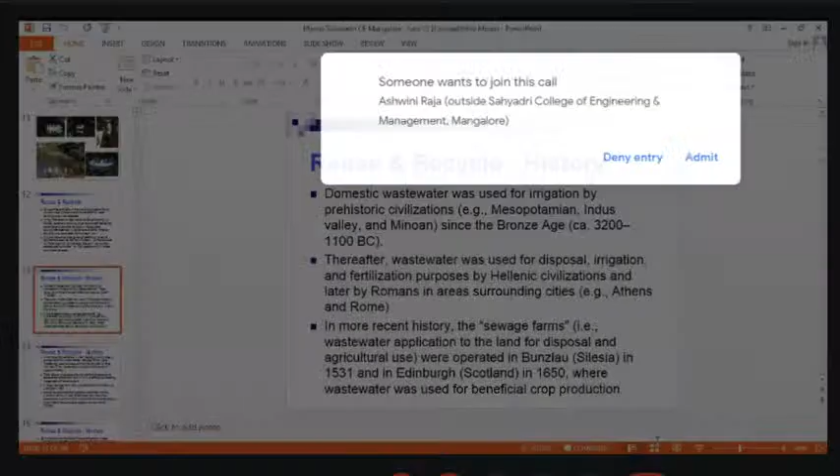No, no, it's not in slideshow mode. One minute. Yes, it's moving, but not. I'll do one thing. It's in, no? Yes, sir. The next slide. I can see. Now reuse and recycle, history. Photos are not seen, no? No. Slide movement is not possible, but this is okay.

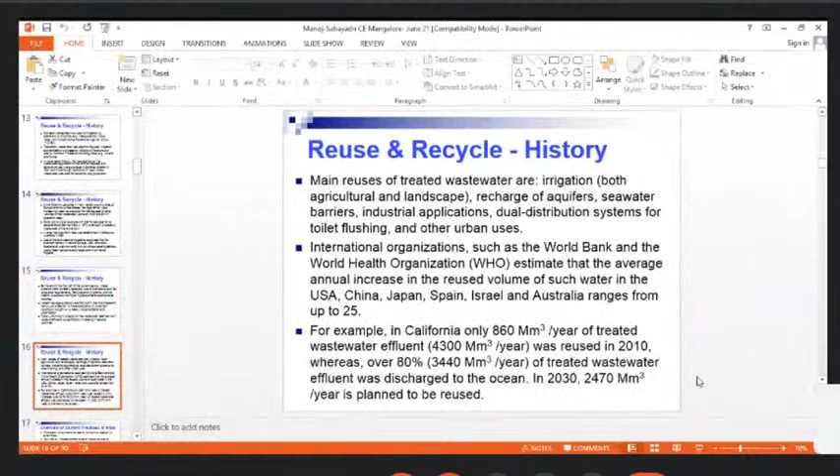Okay, sir. These photos you can see now, no? Yes, now you're zoomed, I guess. And the next slide, reuse and recycle. History. Now it is the 16th slide. Sir, if you make it full screen mode, it is not visible? The slide movement is not taking. If I make it full screen, the first slide you can see now, no? It is not in full screen mode.

Sir, if you share it as entire screen. Entire screen, stop sharing. One minute, I'll try that. It is not taking. You have to click that window, sir. Window only I clicked. Yeah, now it is coming. Your entire screen can be seen now. Now open PowerPoint from desktop. Now click slideshow.

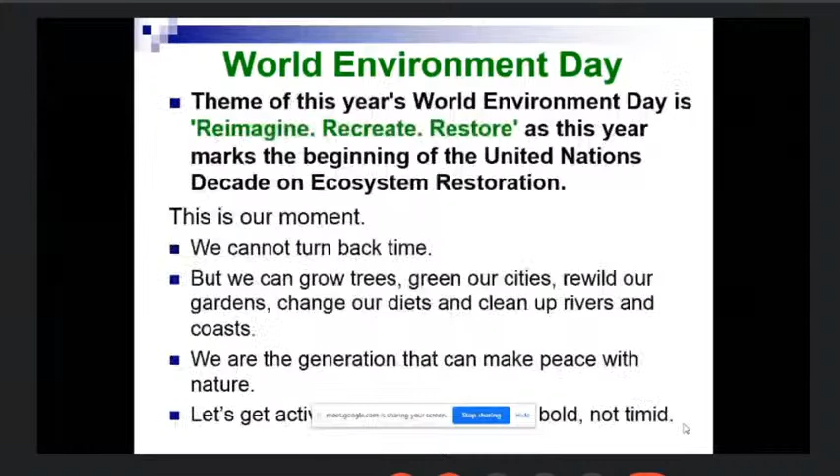Yes, now I can see the full slide. Second slide, third slide. Third, yes, sir. Ecosystem restoration. Okay, then I'll make it like this only. Yes, sir. Okay, sir. Fine, sir.

Sunil, you start. Okay, sir. Prakash, sir. Okay. Yes, sir.

Good morning, all. So today we are gathered here for a webinar on advanced wastewater treatment for utility of treated wastewater for secondary purposes.

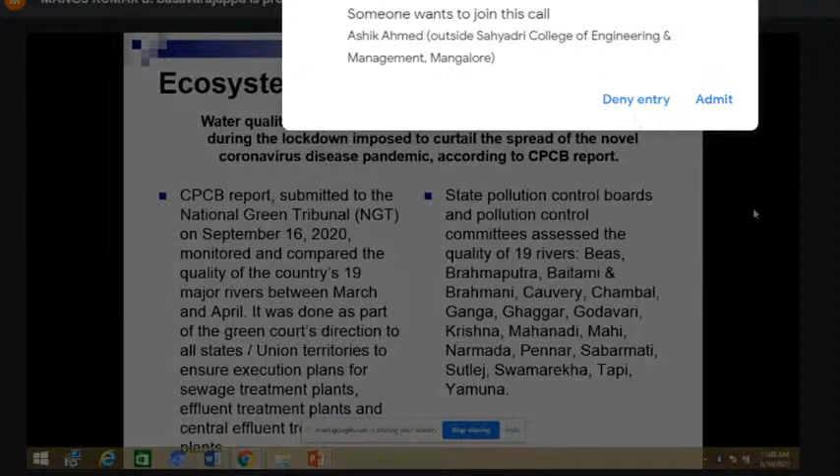That is considered for Yamuna near New Delhi as well. All these rivers have been considered polluted. So there is a requirement of stopping the effluent discharge to such rivers.

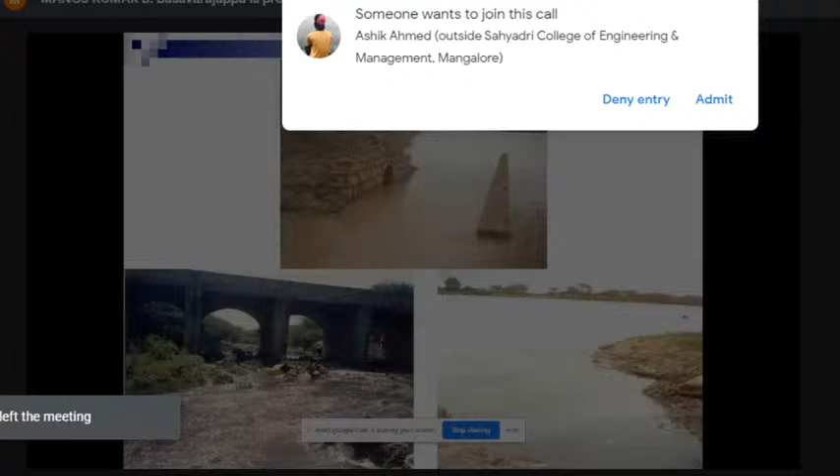Whenever we go for monitoring of rivers, I have taken some photographs. These are all photographs taken by myself, not from internet resources. The top photograph is from Kaveri. There you can see the fort, and there is a pipeline that is actually a tunnel for entry and exit of soldiers during Tipu Sultan's time.

Now that tunnel is converted to a pipe outfall for wastewater discharge into the Kaveri River. Just opposite this outfall, there is an intake for Mandya city, and during summer season this wastewater might reach near that intake. That is the reason they have constructed a wall.

The bottom two figures are near Davangere. There is a halla called Betur Halla near Davangere, near the Old City, and it is Old City wastewater which is running in that halla. You can see washing activities, cloth or utensils, in the same water, and this same water will reach Tungabhadra River, the bottom right photograph.

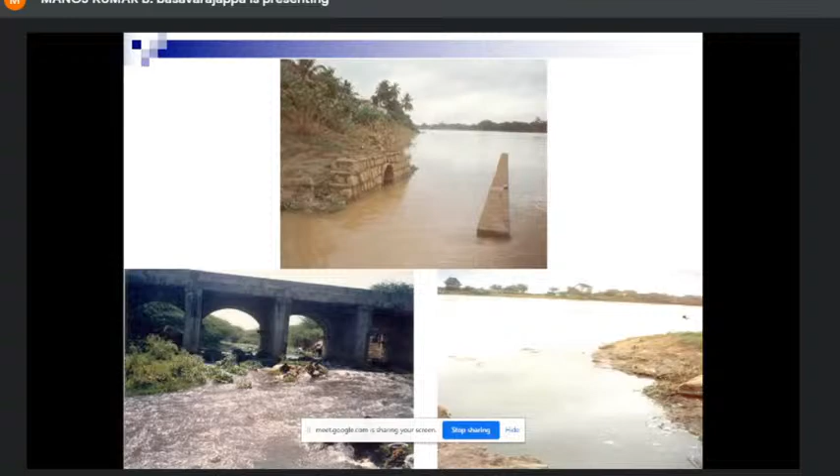Again, you can see nutrients presence in wastewater. That is the reason I'll make a presentation on that. The nutrient removal is very important from wastewater. If it is left in the wastewater by treating only removal of BOD or COD, it causes aquatic plant growth.

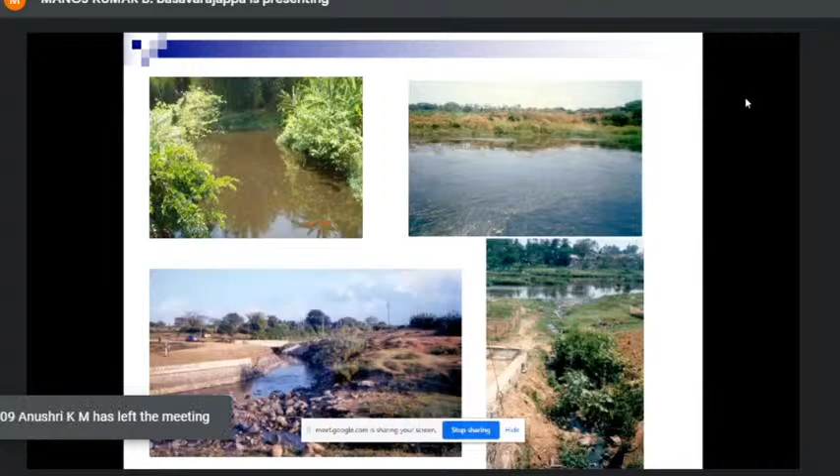Such growth happens in rivers like this, top photograph. Bottom, this is in Nanjangud. Now this is not happening. There was a textile industry, and this was an irrigation channel. You can see the channel, and colored effluent entering into the channel. Now that industry has been closed.

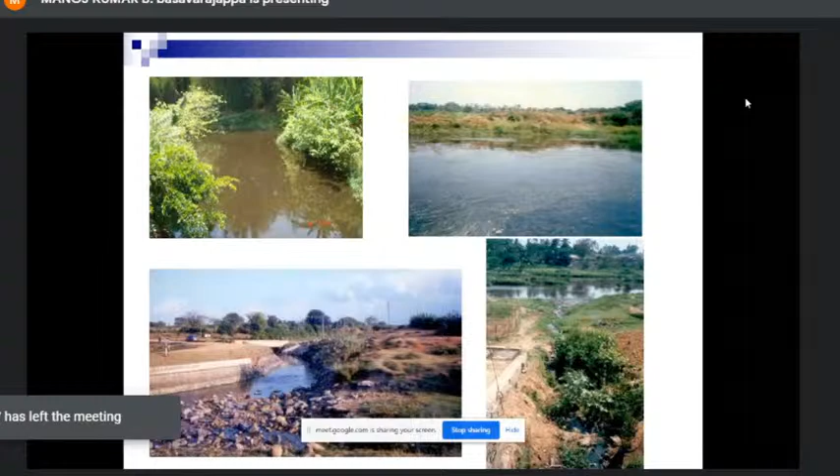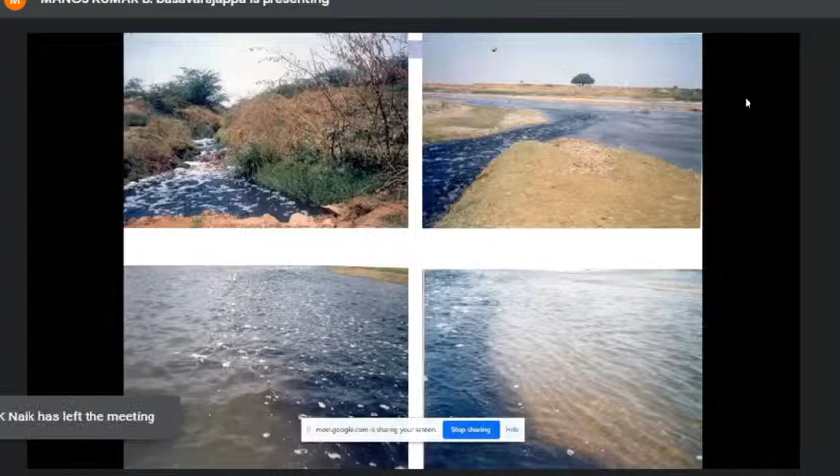And this is again Tungabhadra River near Harihar town, polluted by industrial effluent. You can see from the bank the wastewater is entering into the river, and river flow is very less. You can see the bottom photograph, the depth of the river, bottom of the river. In such low flow conditions, the impact on river water quality will be more.

When we went for Kali River monitoring, we saw many alligators in that stretch where the effluent is entering into the river. So in extreme summer, the impact on aquatic species will also be more.

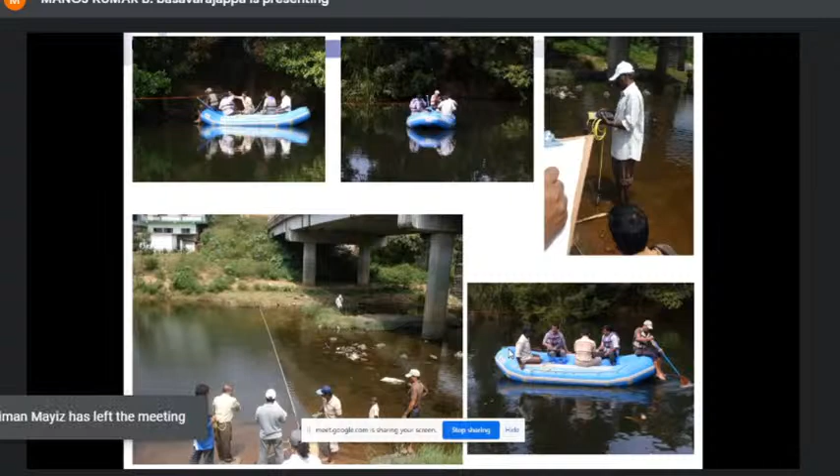And once we pollute the river by discharging wastewater, the monitoring is very, very expensive. This is how we monitor from our institute. This is in Madikeri, wherein coffee pulping wastewater is getting discharged into the Kaveri stream. We are monitoring it, and it is very expensive, and we cannot monitor all the time.

So basically, we have to prevent wastewater entry into the river. How can wastewater entry into such rivers be prevented? By treating the wastewater and reusing or recycling it. Several industries are following that. They are not letting out their effluent outside their premises. They are reusing it for various secondary purposes.

That is what my presentation is about. With this introduction, we will go to reuse and recycle. 80 countries and 40% of world population are facing chronic water problems, and the demand for water is doubling every 2 decades. Every 20 years, the demand is increasing.

In the handbook on service level benchmarking, by the Ministry of Urban Development, Government of India, they have defined reuse and recycling of sewage as the percentage of sewage recycled or reused after appropriate treatment. This is very important - after appropriate treatment, in gardens, parks, irrigation, etc. And it is to be at least 20% to begin with.

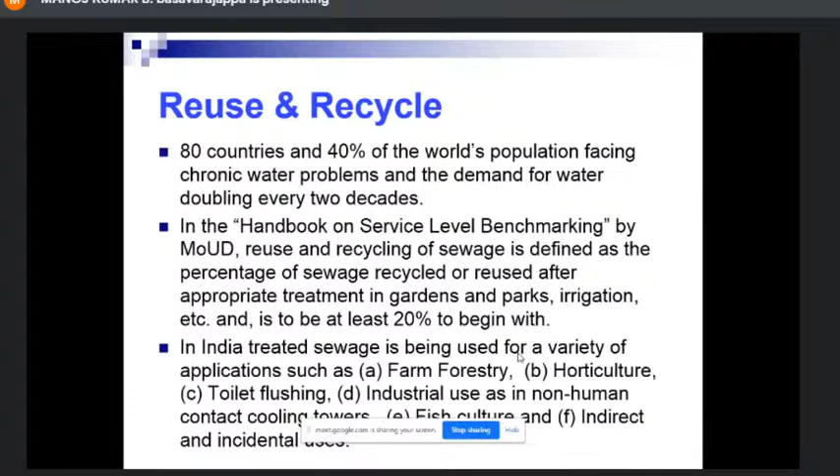In fact, whatever wastewater they are generating from their premises, they are treating it, and adjacent there is NAL. They are buying the wastewater generated from NAL, treating it in their premises, and reusing it for secondary purposes including cooling towers, fish culture, and indirect and incidental uses.

So coming to the history of reuse and recycle: domestic wastewater was used for irrigation by prehistoric civilization since the Bronze Age, that is 3200 BC. Wastewater was used for disposal, irrigation and fertilization purposes by Hellenic civilization, and later by Romans in areas surrounding cities. Whatever wastewater the city generated was used for irrigation purposes - examples are Athens and Rome.

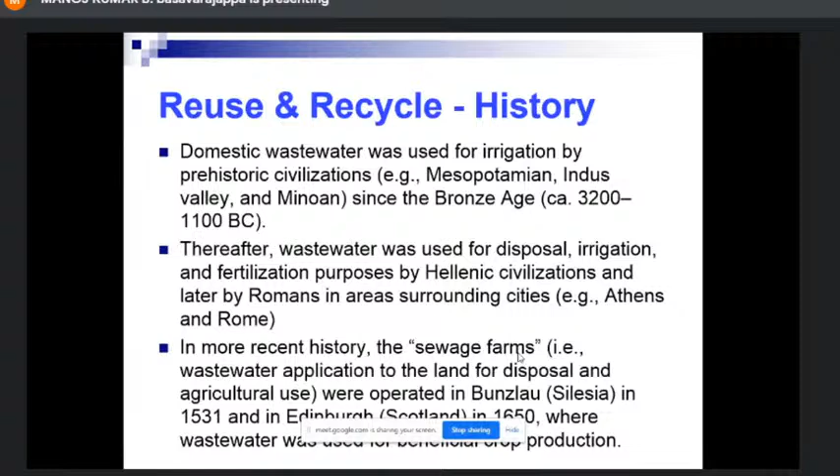In more recent history, sewage farms were developed for wastewater application to the land for disposal, which is nothing but agriculture use. In Silesia and in Scotland, in 1531 and 1650, it was practiced. In Europe and the United States also, sewage farms are there, and they are following this for centuries.

Paris is a typical example, with the first sewage farms established in 1872, eventually processing wastewater of the entire Paris town. In Melbourne, Australia, also in 1897, a sewage farm was established. The wastewater generated from Melbourne town was used for irrigation purpose. In the USA and Europe, in the 20th century also, they reused and recycled wastewater for irrigation purposes.

So modern sewage systems were first built in the mid-19th century, because there were drawbacks in the usage of wastewater for irrigation purposes.

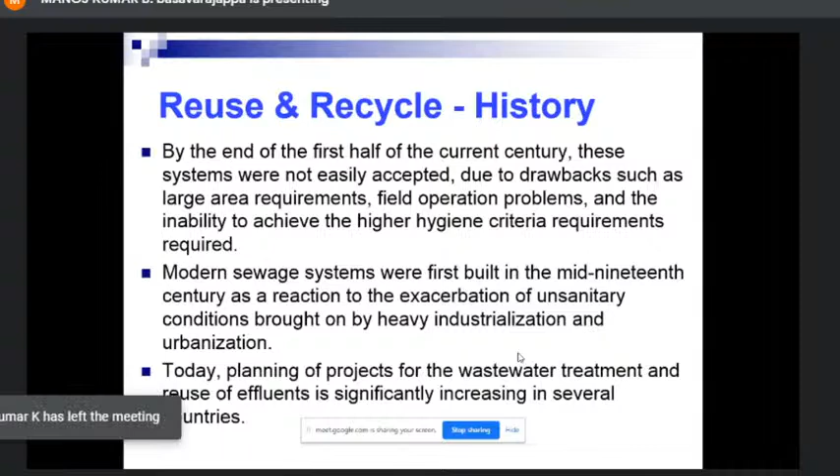Major issues are hygiene and health problems associated with irrigation farming. The modern sewage system was first built in the mid-19th century as a reaction to the exacerbation of unsanitary conditions brought on by heavy industrialization and urbanization. Today, the planning of projects for wastewater treatment and reuse of effluents has significantly increased in several countries, including India.

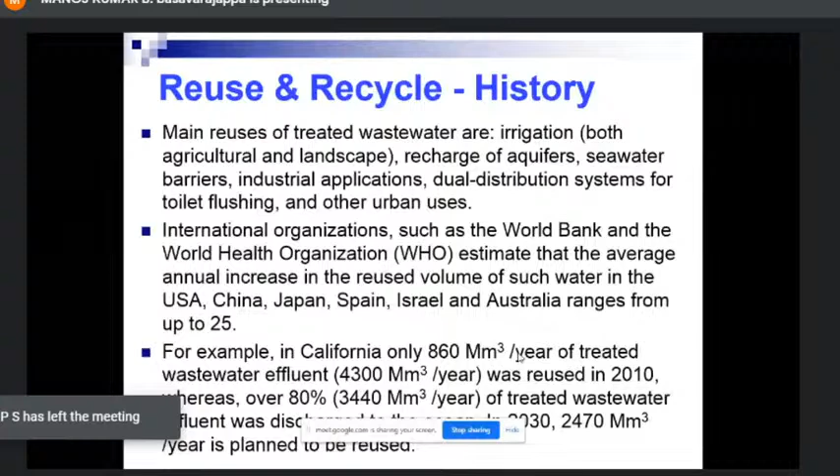Coming to Indian cities wherein treated sewage is utilized for various purposes. Chandigarh is using treated sewage for horticulture needs of its green areas. Delhi has put in place planned reuse of treated sewage for designated institutional centers, for secondary purposes only. Secondary treated sewage is purchased and treated for use as cooling water makeup in the industrial sector by Madras Refineries in Madras, as well as the GMR Vasavi power plant in Chennai, and RCF in Maharashtra.

RCF in Maharashtra is located in Chembur, Bombay. They are purchasing wastewater, not water, from the Mumbai Municipal Corporation, treating it in their premises, and using it for manufacturing processes. There is literature showing that buying raw drinking water for manufacturing would be expensive compared to purchasing wastewater from the corporation and treating it for manufacturing purposes.

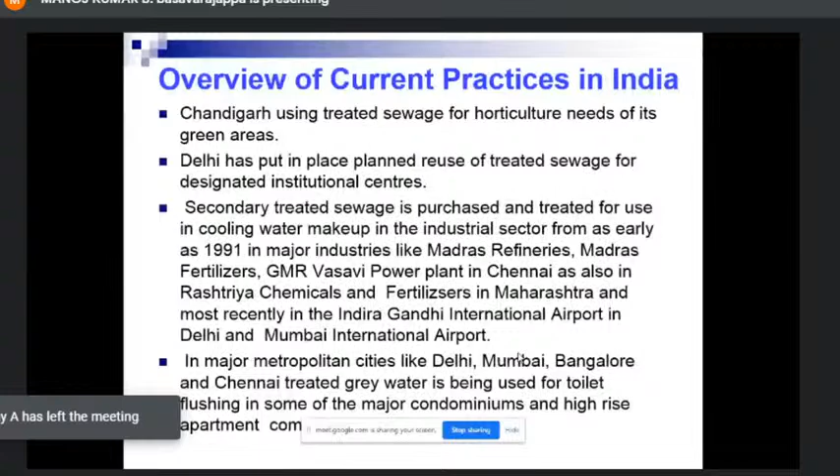So a major portion of the treated wastewater from high-rise apartments in major cities is being reused in their premises only. The government of Karnataka has also issued an official directive to ensure that only tertiary treated sewage is used for non-potable purposes like gardening, including parks, resorts, and golf courses. In fact, the Bangalore Water Supply and Sewerage Board is selling the treated wastewater in tankers to many such resorts, hotels, parks, and golf courses.

Indian Railways is also following reuse and recycling for washing their coaches in Bangalore and Mysuru. In Mysuru they recently erected an STP, a sewage treatment plant, and whatever wastewater is generated from their premises is taken to that STP and, after treatment, used for washing coaches. And ISRO Satellite Center, I gave this example.

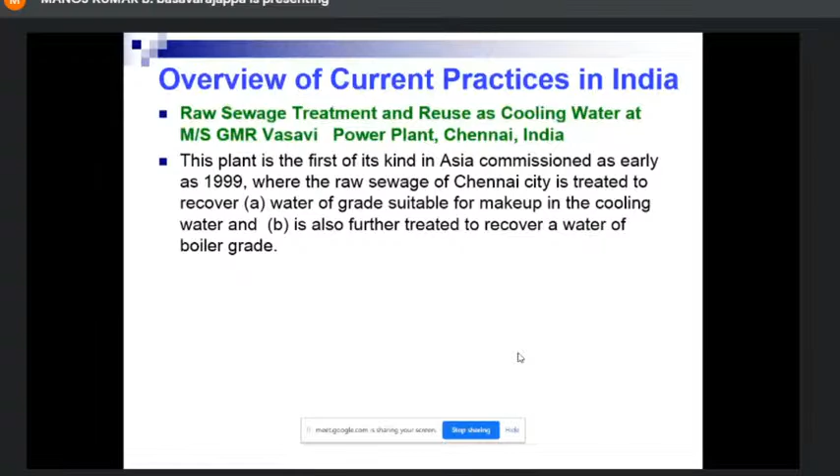Coming to the GMR Vasavi power plant at Chennai, this is the first of its kind in Asia, commissioned as early as 1999, wherein the raw sewage of Chennai city is treated in their plant premises to recover water of a grade suitable for cooling water makeup, and is further treated to recover boiler-grade water. This is the flow sheet of how they are doing it.

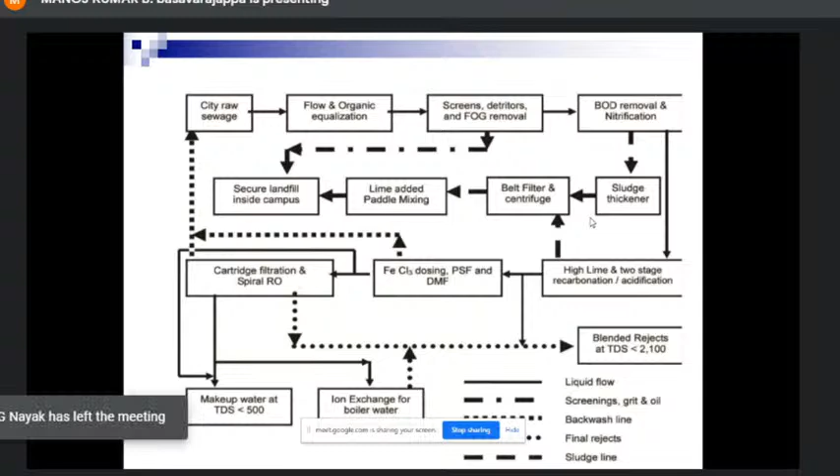They are using Chennai city raw sewage. They take it into a flow equalization tank and pass it through screens to remove coarse material, and a detritor to remove inert materials like glass pieces and seeds. Then they give biological treatment, including nitrification, so ammonia nitrogen is removed from the wastewater. It is sent to lime treatment, two-stage recarbonation and acidification. After that, ferric chloride dosing is done with the pressure sand filter.

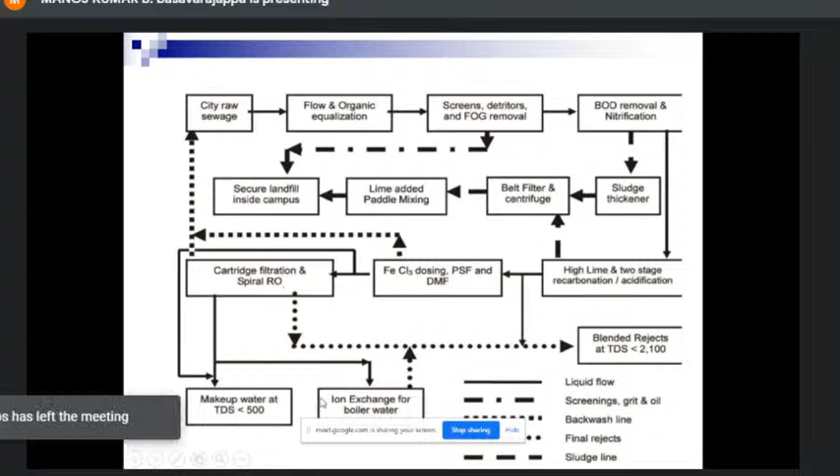It is passed through filtration and spiral RO, used as makeup water, and through ion exchange for boiler water. This reuse is practiced in Chennai and at the Indira Gandhi Airport. This is the latest plant in India, wherein they take raw water and treat it in a reverse osmosis system.

And whenever we use an RO unit, there will be rejects from RO, and that is taken and mixed with the sewage generated from the terminal building, and that is blended. That RO reject and sewage will be treated in a biological nitrification-denitrification reactor. In the previous case in Chennai, it was only biological nitrification. Here it is denitrification also.

The ammonia nitrogen present in sewage will be converted to nitrate nitrogen, and from nitrate to nitrogen gas. So there will be no nitrogen present in sewage after treatment. Then this is passed through FeCl3 to remove possible colloidal phosphorus also. All the nutrients will be removed, and finally it is passed through an ultrafiltration cartridge filter for killing the bacteria.

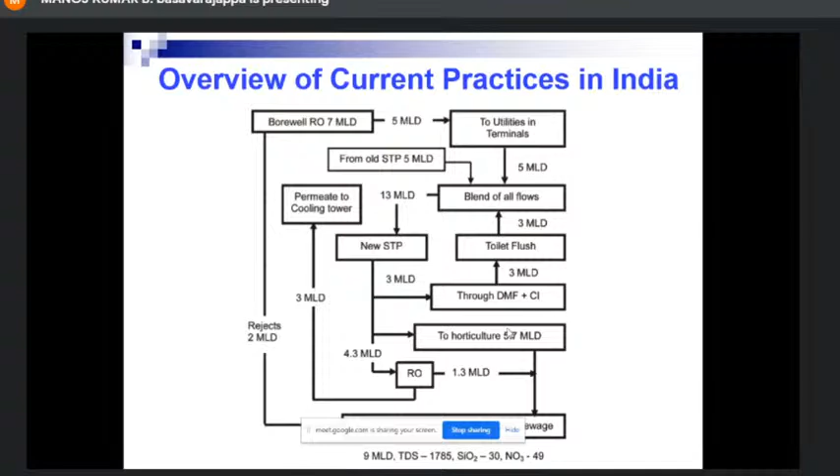The raw sewage BOD is 110 to 130 milligram per liter, and treated is 8 to 10. Ammonia nitrogen, as I said, is 45 to 53 milligram per liter. After nitrification and denitrification, it has come down to 1.5 to 3, and all the solids will be removed. In the final treated sewage, it is 10 to 15 milligram per liter. And this treated sewage is sent for further treatment for removal of phosphorus and ultrafiltration.

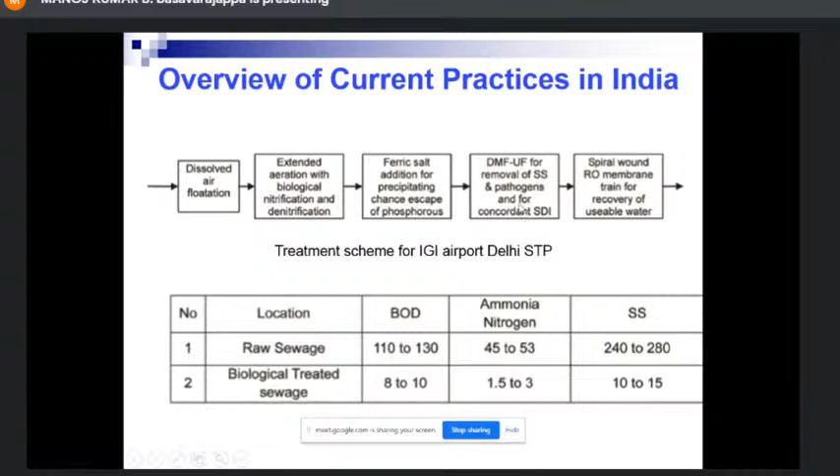Another plant is Mumbai International Airport. Here they are using a sequencing batch reactor, a circular sequencing batch reactor, followed by hypochlorination to kill the microorganisms. Then it is sent to pressure sand filtration and ultrafiltration. So the treated sewage is free of color, organics and odor, and this treated sewage is used for toilet flushing. And I will show you.

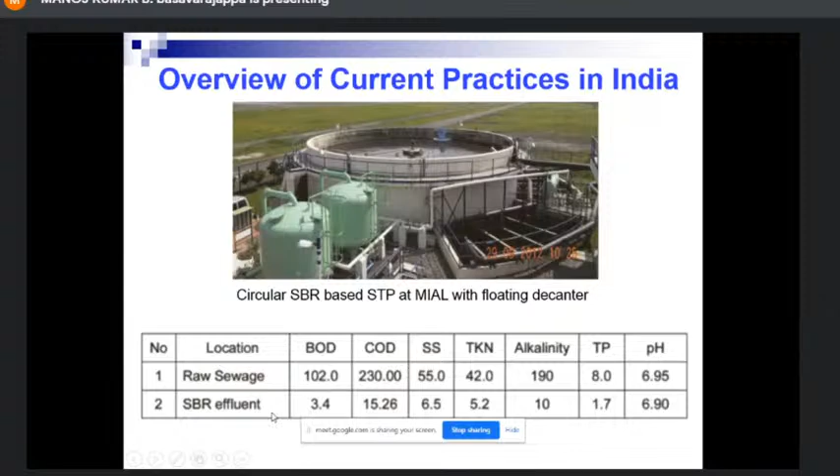This is the circular SBR at Mumbai International Airport. And these two green tanks are filters, pressure sand filter and dual media filtration. And this is the SBR treated effluent quality shown. BOD has reduced from 102 to 3.4, COD from 230 to 15.26.

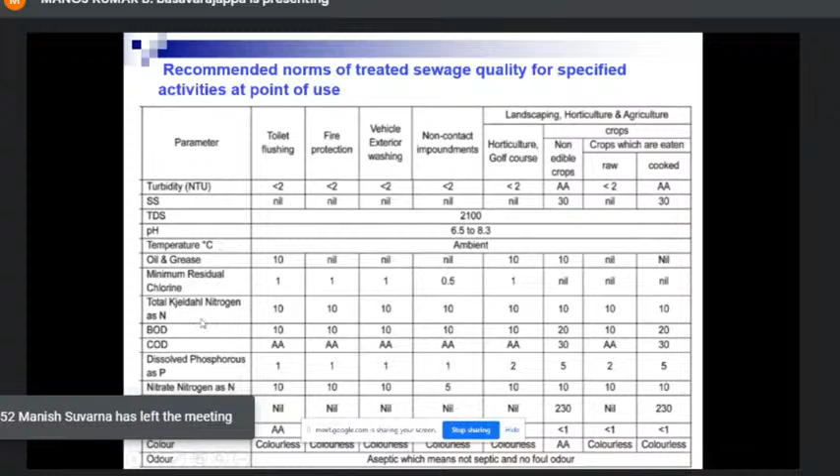One more very important thing is, whenever we use treated wastewater for secondary purposes, for example toilet flushing, fire protection or vehicle exterior washing, as is followed at Bangalore in apartments, what should be the quality of the recycled water? That is given here. For example nitrogen should be 10 milligram per liter. If it is less than 10 milligram per liter, we can use it for all these secondary purposes. Nitrate nitrogen, it is 10 and 5.

And fecal coliform, this is very important. It is nil except for irrigation purposes. Color, it is colorless. And TDS should be less than 2100 milligram per liter. So if we have to maintain this quality, for example BOD less than 10, phosphorus less than 1, nitrogen less than 10, then we have to treat it in a proper treatment system.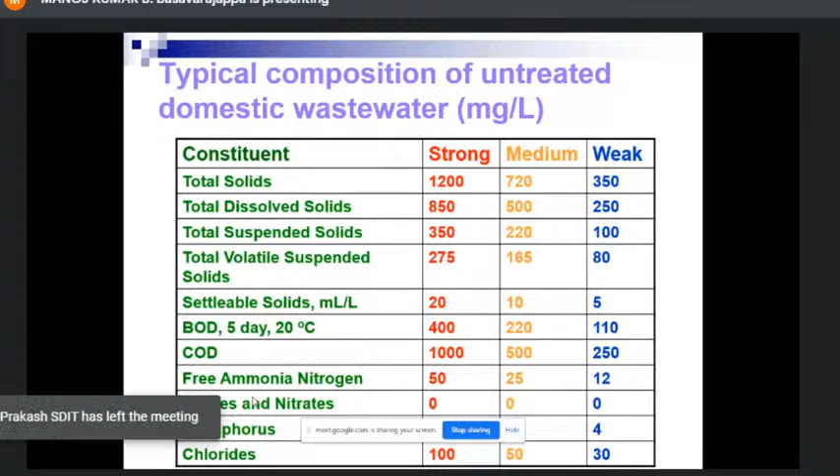And whatever wastewater is generated from any premises, whether it is domestic, for example in apartments, or from a town or city, it can be distinguished as strong, medium and weak wastewater by characterizing its constituents in the laboratory. For example, if BOD is 400, it is strong. If BOD is 220, we will call it medium with respect to that pollutant. If it is 110, weak.

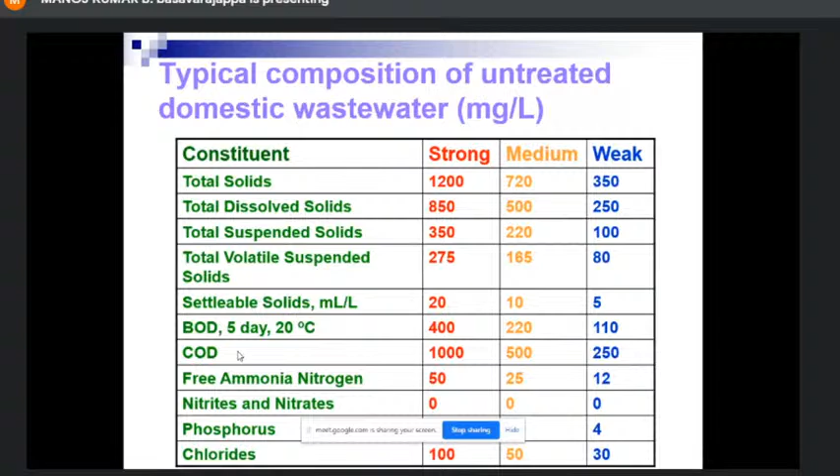Similarly, ammonia nitrogen 50, 25, 12. So based on its characteristics, we will distinguish it as strong, medium, and weak, and accordingly we will treat the wastewater in a treatment plant. And we can classify wastewater treatment methods as physical, chemical, and biological. Physical is unit operations; there is no process involved.

Say for example, in screens, wastewater flows through the screens, and whatever material is larger than the opening size will be arrested in front of the screen. That is an operation. The solids or any grit material present in wastewater, when sent to a settling tank, will settle to the bottom. There is no process involved. It is an operation, a settling operation.

Whereas chemical and biological are unit processes. Some reactions will be taking place in the reactor while treating the wastewater. Physical unit operations: the units are screens, sedimentation, flotation to remove oil and grease, and filtration. All these are physical unit operations.

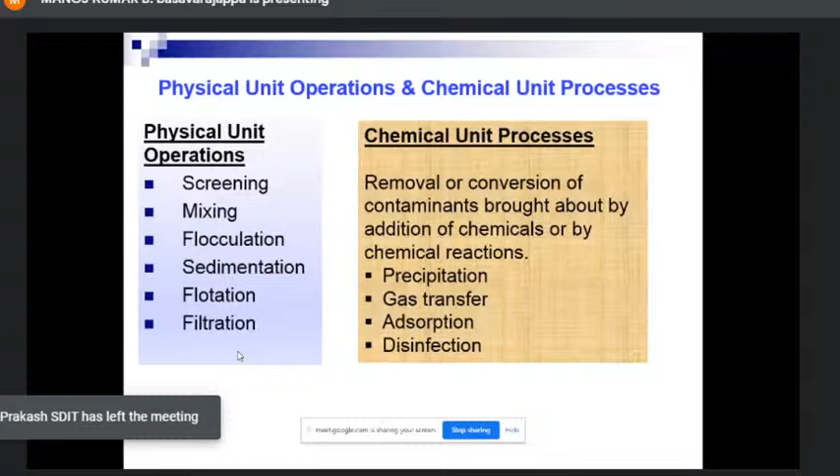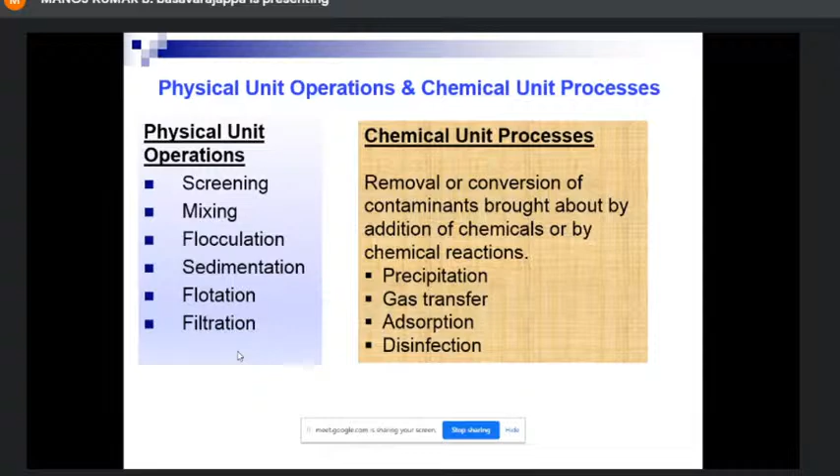Chemical unit processes: precipitation. Say for example, if we want to remove phosphorus, we can remove the phosphorus from wastewater by precipitation. Gas transfer, adsorption, disinfection, all these are chemical unit processes wherein no microorganisms will be used for treating wastewater. Biological unit processes are ones which use microorganisms for treating the wastewater.

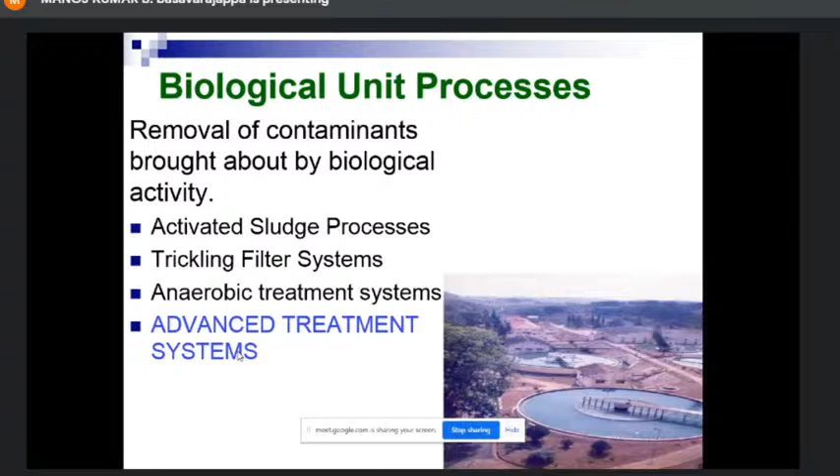Conventional treatment systems such as activated sludge process, trickling filter systems, and anaerobic treatment systems are already in place in many cities and apartments. Today I am going to tell you about advanced treatment systems for removal of nutrients from wastewater. Activated sludge, trickling filter, or anaerobic treatment systems remove only organic carbon, that is BOD and COD, whereas nutrients will not be removed from such treatment plants.

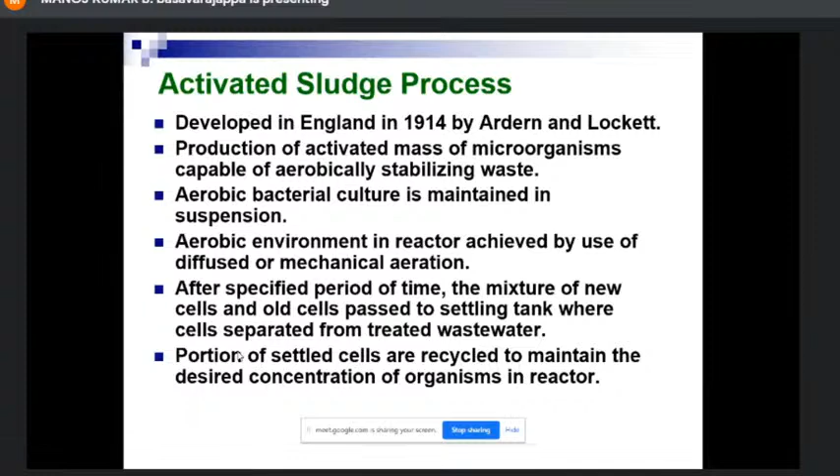So an aerobic environment in the reactor is achieved by use of diffused or mechanical aeration. And once oxidation takes place, that is, the microorganisms get oxygen as well as food in the form of organic matter, they start multiplying. And once they start multiplying, the new microorganisms or cells are called activated sludge.

I will not go into details of ASP and its modifications and design parameters, but we have to maintain MLSS, mixed liquor suspended solids. Why it is called mixed liquor: the new microorganisms grown in the aeration tank are made to settle in the secondary settling tank, and that is called activated sludge, and it is recycled back to the aeration tank where the fresh wastewater is entering. So when fresh wastewater mixes with activated sludge, it is called mixed liquor suspended solids.

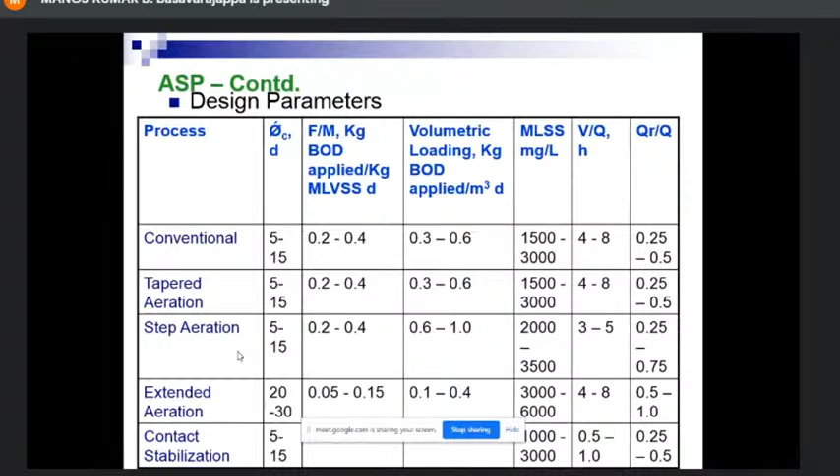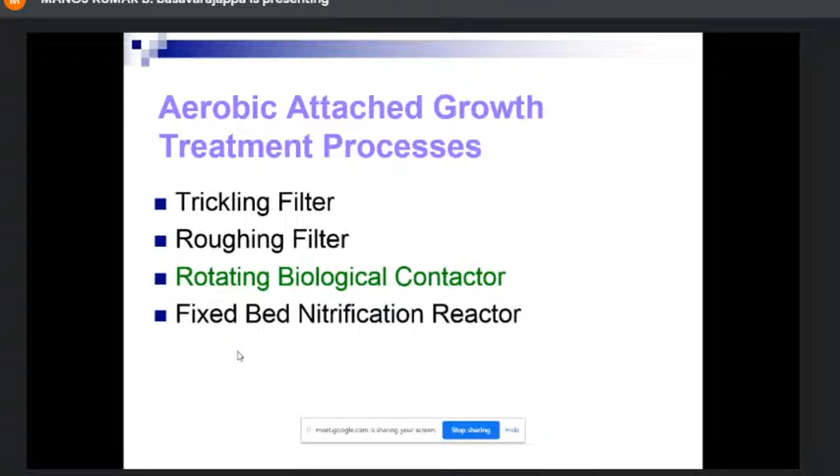These are all suspended growth. Other attached growth systems are trickling filter, roughing filter, rotating biological contactor, and fixed bed nitrification reactor. All these are used. This RBC, rotating biological contactor, you can see at ISRO Satellite Center in Bangalore. It was installed long back, in 1998-99, I think, when it was put into operation. Trickling filter is another attached growth system, and this is the design information.

So the conventional treatment systems which I showed, trickling filter, activated sludge process or anaerobic treatment, whatever it might be, remove only organic carbon, and partial nitrification takes place, only 40% nitrification. Nowadays, importance is given to nutrient removal systems. If nutrients are not removed from wastewater, there will be problems of aquatic plant growth in water, as you can observe in the following photographs. In all three photographs, you can see aquatic plant growth.

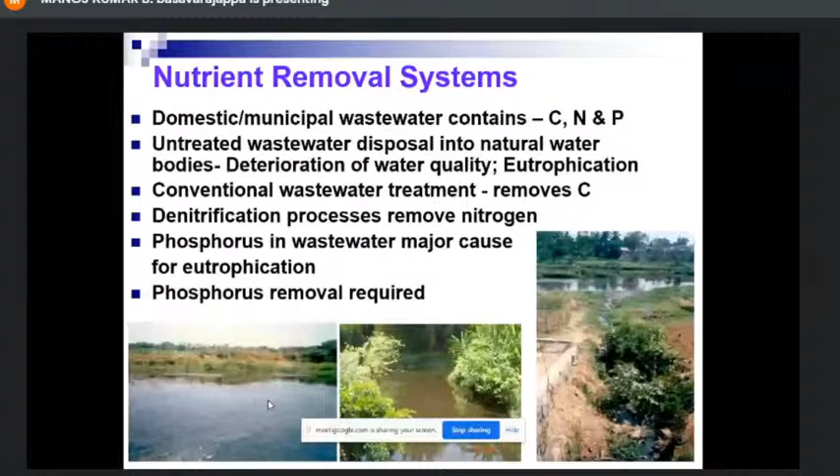It is an aesthetic nuisance. So domestic wastewater contains organic carbon in the form of BOD and COD, nitrogen in the form of ammonia nitrogen and nitrate nitrogen, and phosphorus as orthophosphate. All three have to be removed from wastewater. If these nutrients are not removed and are discharged into lakes or surface water bodies, it causes eutrophication.

So there are several physico-chemical treatment methods for phosphorus, but the only problem in physico-chemical treatment is it will generate chemical sludge, because we are using chemicals for precipitating out nutrients, and this is uneconomical, and sludge disposal will be a problem. The biological processes are claimed to be effective and economical, and we can remove the phosphorus from such systems. And there are many continuous processes like anaerobic oxic, anoxic anaerobic oxic, Bardenpho, University of Cape Town, and VIP process. These are all conventional processes.

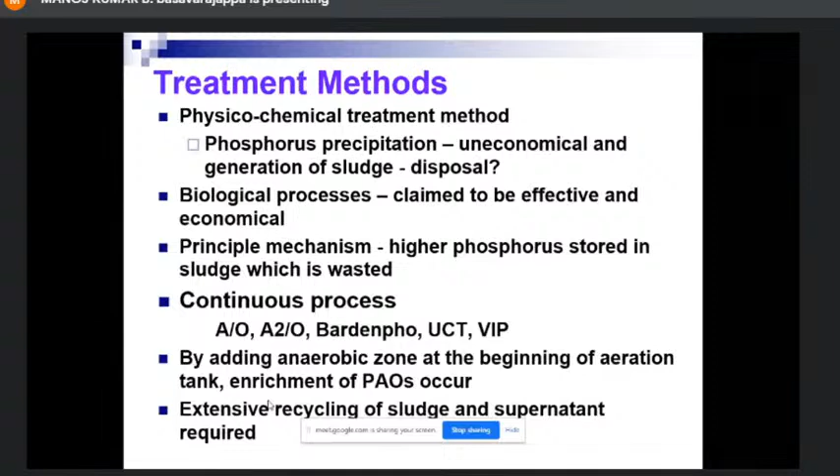And for biological nutrient removal, both anaerobic and aerobic conditions are required, that is microorganisms surviving under anaerobic condition without oxygen, and microorganisms surviving under oxic condition with oxygen.

This SBR, sequencing batch reactor, I was telling about, Mumbai International Airport, where they have provided this treatment system. And in Bangalore, almost all apartments, even in Ravi Shankar Guruji's Art of Living, they have put a sequencing batch reactor for treating wastewater. And this is a batch reactor, whereas the previous ones we discussed are continuous flow reactors.

And here, since it is a batch reactor, we fill the tank, and we provide an anaerobic phase. We will not supply oxygen to the system, and after a certain duration, oxygen will be supplied, and it will be stopped, and the solids will be allowed to settle, and 50% of treated wastewater on the top will be taken out. That is called decantation. This is called a sequencing batch reactor, and there is high possibility of removing carbon, nitrogen, and phosphorus.

Organic carbon, anyhow, in anaerobic or aerobic condition, it will be removed. Ammonia nitrogen in aerobic condition gets converted to nitrate, and nitrate nitrogen under anoxic, that is anaerobic condition, will be removed. So partial nitrate removal will be there. And for phosphorus removal, both anaerobic and aerobic is required, and I'll explain.

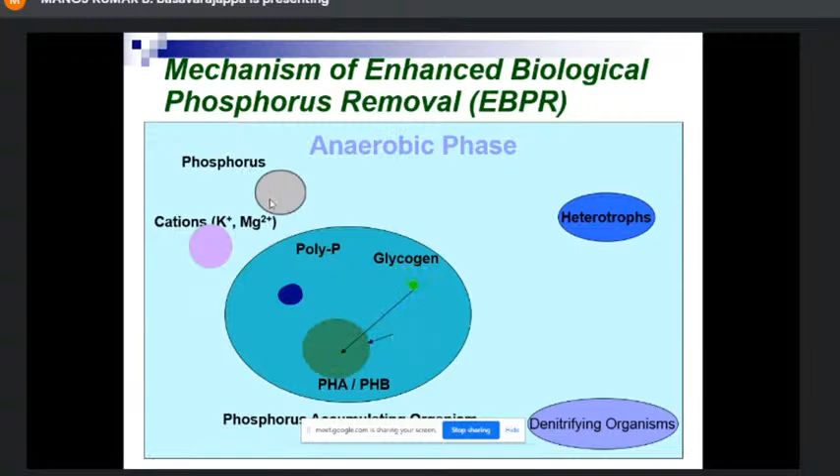After 4 hours of anaerobic phase, another 4 hours of aerobic phase will be provided. In that phase, the released phosphorus and raw wastewater phosphorus will be taken inside the microorganisms called phosphorus accumulating organisms. They release in the anaerobic phase and take up in the aerobic phase. But while taking up, the raw wastewater phosphorus will also be taken inside, and the polyphosphate concentration within the microorganism will increase.

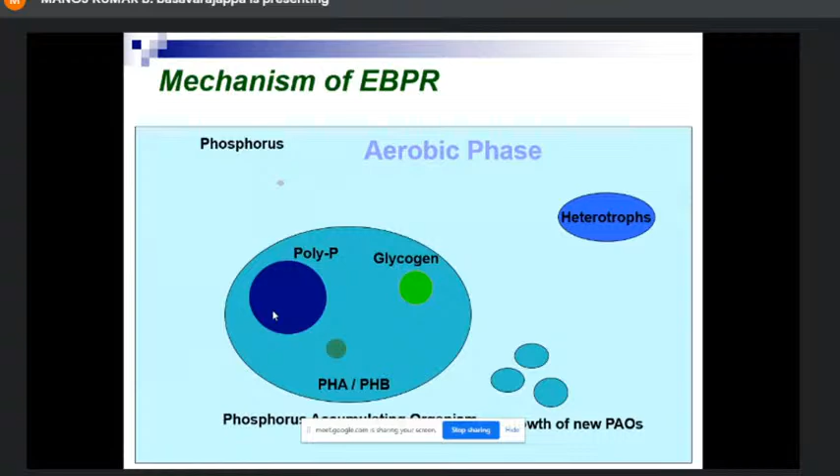After 4 hours of aeration, the aeration will be stopped, and these microorganisms will settle to the bottom and be taken out. These phosphorus accumulating organisms contain phosphorus, and can be used as fertilizers for plant growth. This is the mechanism of enhanced biological phosphorus removal, and I have done some studies on this. I will not go into much detail. One cycle I will show you.

See, phosphorus concentration. In the left graph and right graph, you can see in the anaerobic phase the concentration is increasing because release from phosphorus accumulating organisms occurs. After that, the wastewater phosphorus and released phosphorus will be taken up in the aerobic phase. So from 4.5, it increased to 9 or 10 milligrams per liter due to release, and the entire 10 milligrams per liter of phosphorus is taken up in the aerobic phase.

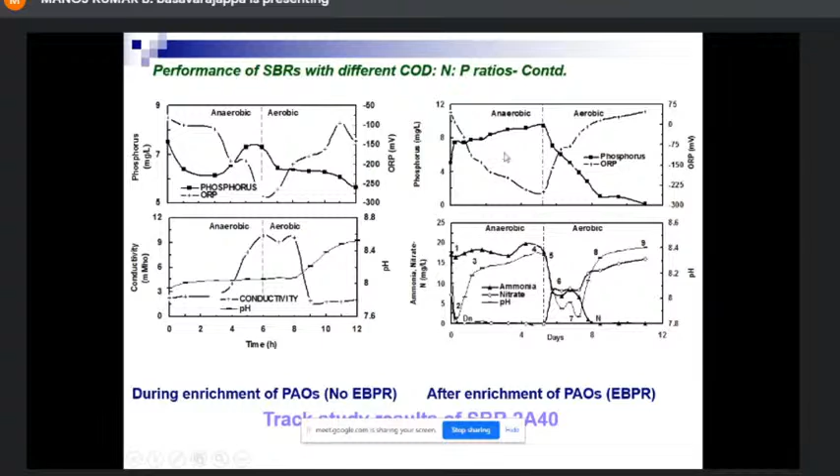This is called enhanced biological phosphorus removal, and this is my research project, and I have done this study here also. You can see in the graph, phosphorus release occurring in the anaerobic phase. In the aerobic phase, the entire phosphorus is taken up.

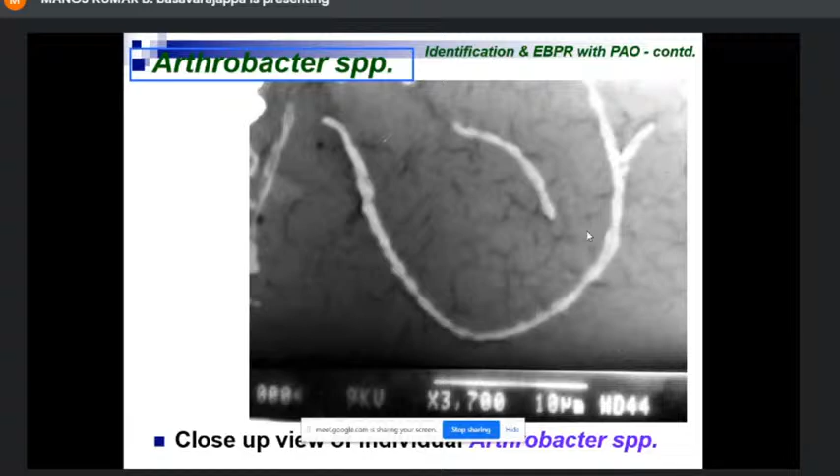And within this microorganism, the release of phosphorus and uptake of phosphorus takes place, individual strain. This is another scanning electron micrograph of a phosphorus accumulating organism, Arthrobacter species. Another is Lampropedia species, also a phosphorus accumulating organism I have isolated. Pseudomonas species, you can see the strain, and 10 micrometers is the size. You can see the scale and observe the diameter or size of the organism.

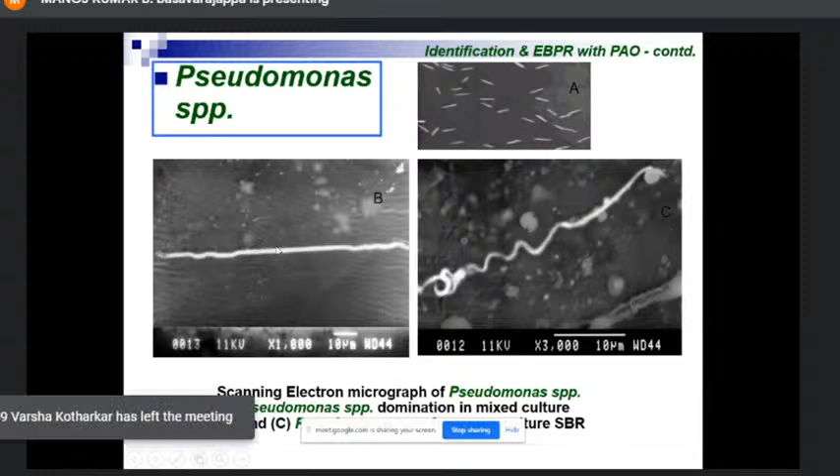Then Streptomyces clavuligerus is another phosphorus accumulating organism. So with nutrient removal and organic carbon removal, the wastewater will be further treated in an activated carbon filter, wherein odor and color removal takes place by adsorption. And further it is sent to a pressure sand filter, where filtration takes place to remove any remaining solids, and it is disinfected.

So with this treatment scheme, by removing organic carbon, nutrients, color, odor, and solids, and by killing the microorganisms, we can reuse the wastewater for construction purposes. One example I am giving is concrete. Concrete is the most widely used material worldwide, and concrete industries have the environmental and societal responsibility to contribute to sustainable development of the countries. It is a significant contributor to air pollution, because we use cement, coarse aggregates and fine aggregates, which contribute particulates, and also a consumer of vast quantities of natural materials, including water. This is very, very important, water.

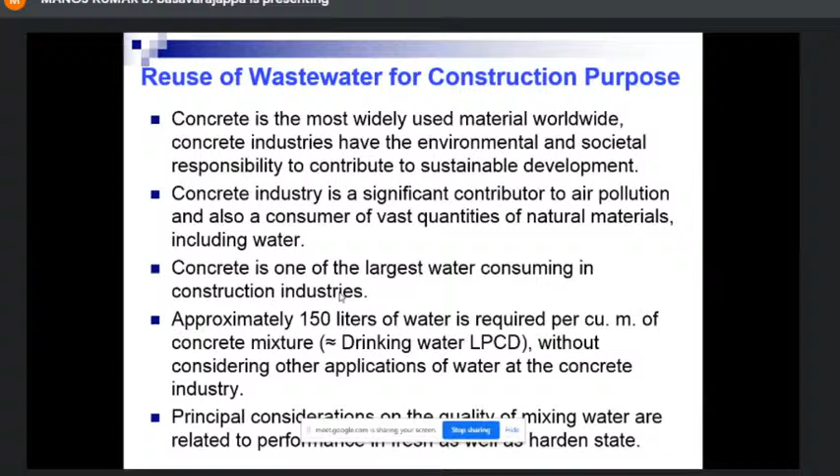And the principal consideration is the quality of mixing water, which relates to the performance of concrete. So the quality of the water plays an important role in the preparation of concrete. In our department, we have a water quality testing laboratory. Many builders bring their water samples, especially for CPWD, Central Public Works Department works, wherein it is compulsory to test the water used for construction, and we test it in our laboratory and give the report.

Impurities and chemical constituents present in water actively participate in the chemical reactions and thus affect the setting time, the hardening of the concrete, and strength development as well as durability of the concrete. So impurities and chemical constituents are very important. In addition, the workers will be exposed to such water, so health issues will be there. The workers will be directly touching the water, so safe handling of such water should be considered at the site.

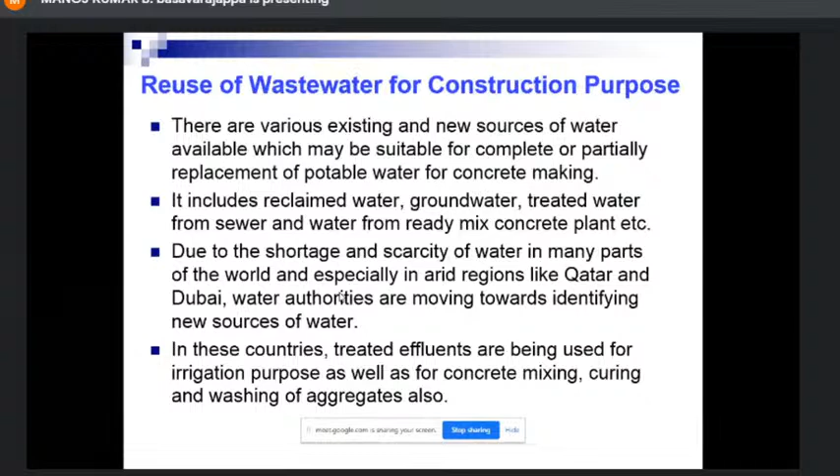In regions like Qatar and Dubai, where you'll not find much drinking water available, they cannot afford it for construction purposes, and they are moving towards identifying new sources of water, including treated wastewater for construction activities. In these countries, treated wastewater is being used for irrigation as well as concrete mixing, curing, and washing of aggregates. Several research studies have been carried out in the world, and with various levels of success, treated wastewater can be used in concrete preparation. Okay.

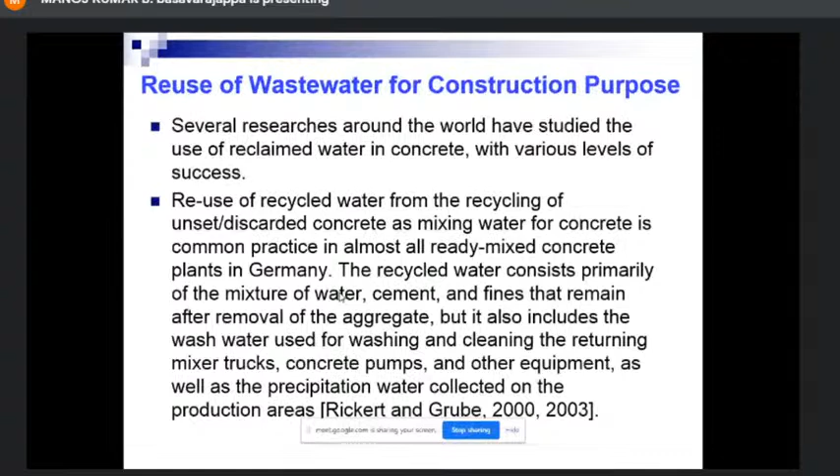The recycled water consists primarily of a mixture of water, cement, and fines that remain after removal of aggregate. It also includes the wash water used for washing and cleaning trucks, concrete pumps, and mixer washing. So these can all be treated as wastewater from construction activities.

Concrete made with recycled water is durable and exhibits similar properties as concrete made with drinking water or fresh water. I will show you one research outcome wherein regular drinking water and recycled water were both used for concrete, and cube testing has been done. The results I will show you.

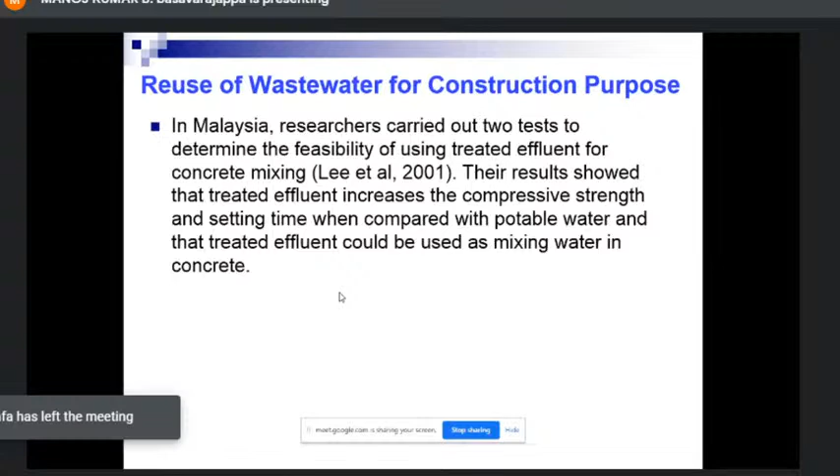In Indonesia, researchers have shown that concrete with improved initial compressive strength could be made with reclaimed wastewater, partially or totally in lieu of the mixing water. In Saudi Arabia, as I said, Arab countries are using treated water for construction activities. In Malaysia also, they are using treated effluent for concrete mixing, and their results showed that treated effluent increases the compressive strength and setting time when compared with potable water, and it is almost comparable.

But what are the tests to be done for reclaimed water or treated wastewater that should be used for concrete or any construction activity? One is pH, limits of acidity and alkalinity test, solids concentration, chlorides, suspended matter, sulfates, inorganic solids, and organic solids. These are some of the parameters considered, and generally the quality of water should be the same as drinking water for construction purposes, but the limits provided for all these parameters should be checked and should be comparable with drinking water.

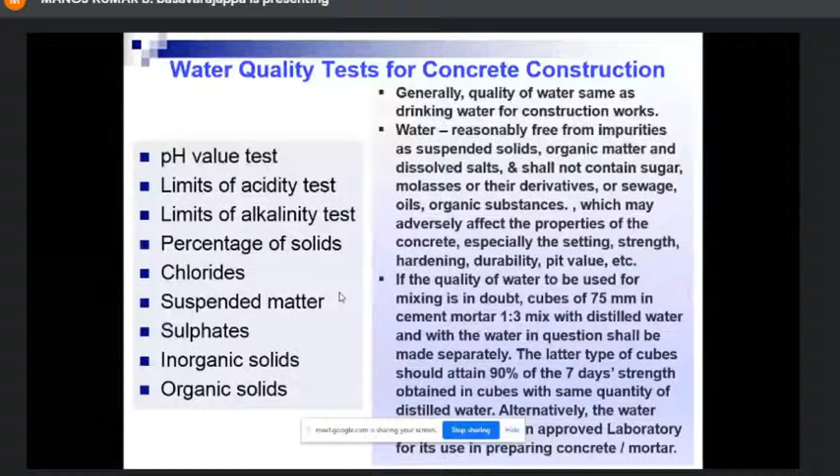If the quality of water to be used for mixing is in doubt, for example if we are using reclaimed water or treated wastewater for construction purposes, what we can do is make cubes of cement mortar in 1:3 mix, one with distilled water and one with treated wastewater, keep them for 7 days, and the cubes should attain 90% of the 7-day strength obtained in cubes with the same quantity of distilled water. So it should be comparable. If it is comparable, then we can say the treated wastewater can be used for construction activities.

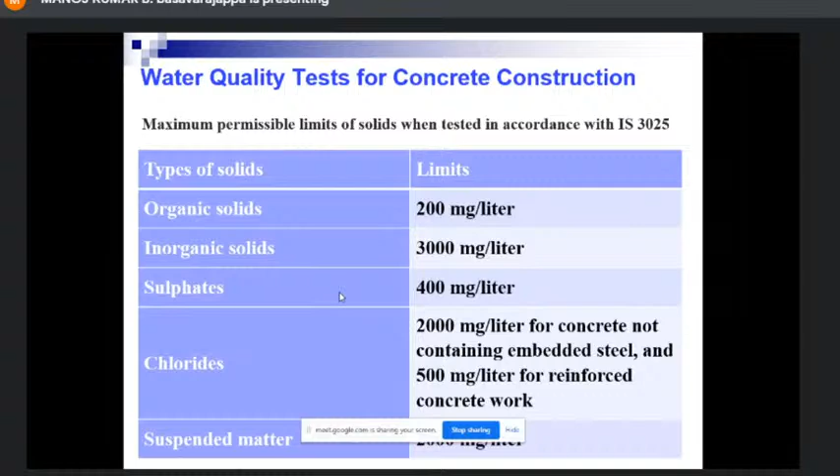These are the limits given by IS code 3025 for water quality for concrete construction purposes. Organic solids should be less than 200 milligrams per liter. Inorganic solids less than 3000 milligrams per liter. Sulfates 400 milligrams per liter. Suspended matter 2000 milligrams per liter. Chlorides for plain concrete without steel, 2000 milligrams per liter, and with steel, that is for RCC, it is 500 milligrams per liter, because salt content might corrode the steel. That is the reason they have limited it to 500 milligrams per liter.

Whenever we use treated wastewater for construction activities, health assessment of workers is very important, because they will be exposed to such water.

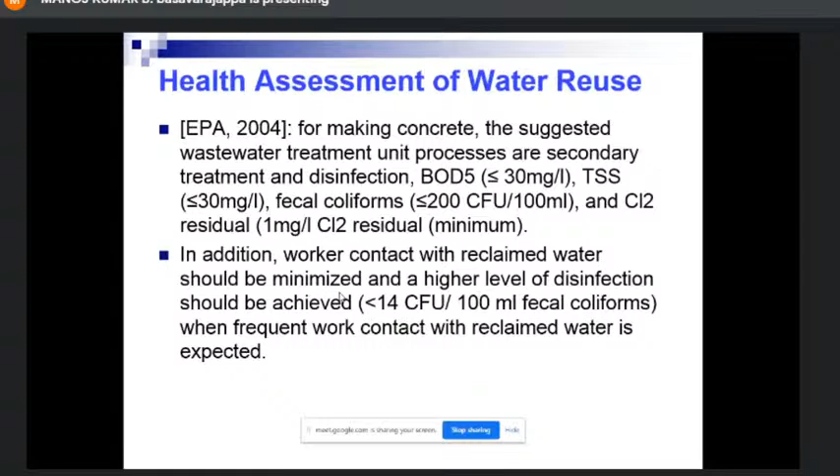The Environmental Protection Agency, US EPA, in 2004, suggested for making concrete a wastewater treatment unit process, that is secondary treatment with disinfection, as we discussed earlier. BOD5, organic matter should be less than or equal to 30, solids less than or equal to 30, fecal coliform less than or equal to 200 colony forming units per 100 ml, and total residual chlorine should be at least 1 milligram per liter. If the worker is exposed to such water, then it has to be disinfected further, and the fecal coliform should be less than 14 colony forming units per 100 ml of wastewater.

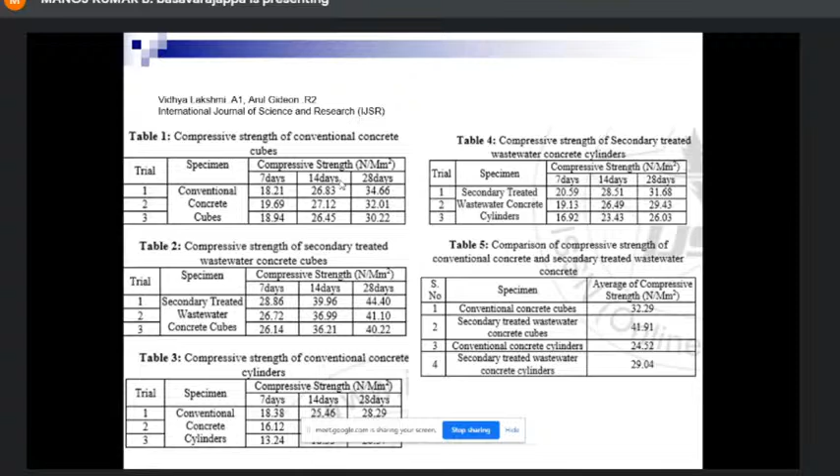This study was done in India: conventional concrete cubes compared with secondary treated wastewater cubes. Cylinders as well as cubes have been compared, and the results are almost comparable. The compressive strength at 7 days and 14 days is almost comparable. In fact, compressive strength is more in the secondary treated wastewater cubes and cylinders.

Just another 5 minutes, I'll tell you some examples. Sunil, can I take another 5-10 minutes?

I was a State Environmental Appraisal Committee member for 2 terms; it is constituted by the Ministry of Environment and Forest, Government of India. Basically, environmental clearance is given for infrastructure projects, mining, and other developmental activities, and there we evaluate environmental impact assessment. For example, if it is a construction project at Mangalore, many construction project EIA reports have been prepared from Mangalore, and they have taken environmental clearance from the authorities.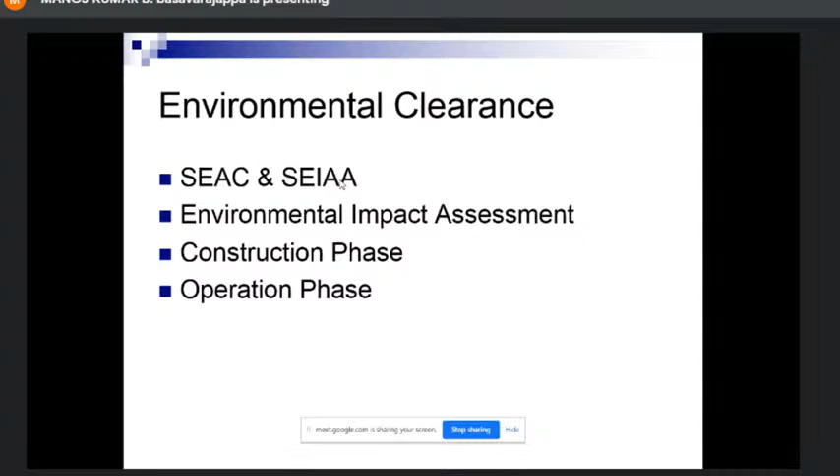In such reports, they present both the construction phase and the operation phase. Operation means once it is handed over to whoever buys the properties. Once it is handed over, in both phases, how the impact will be there, that will be shown in the EIA report.

Just an example of Bangalore: water for construction activities will be sourced from external suppliers, and wherever there is no BWSSB water available, they will source from external suppliers, or they will buy the wastewater from STPs of BWSSB.

Normally, no wastewater generation will be there from construction activities. This is one project at Bangalore, wherein domestic wastewater to a tune of 28.5 cubic meter per day will be generated from workers during construction activity.

What they do with the wastewater is, either they will treat it in an on-site mobile sewage treatment plant - in Bangalore you will see mobile STPs for construction. For that construction place only, they take the STP and treat whatever wastewater is generated. Or in tankers, the workers' generated wastewater will be sent to BWSSB sewage treatment plant for further treatment.

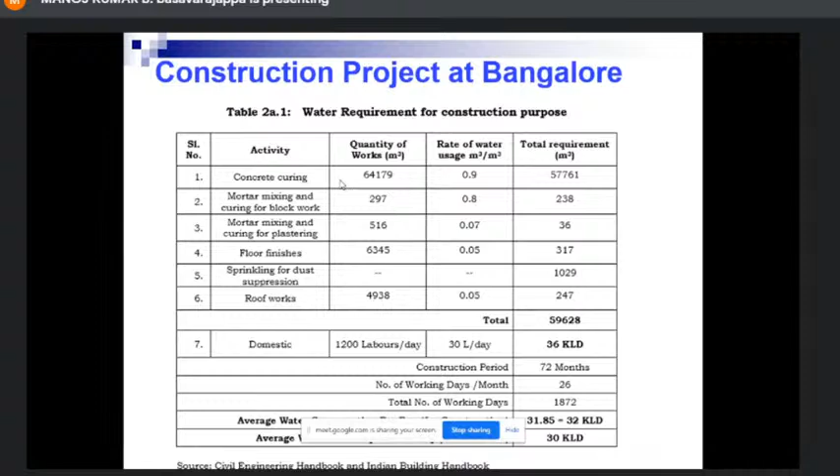And for drinking water needs, it is 36,000 - that is labor drinking water need. The construction period is 72 months, and the wastewater generated is average 30 KLD per day. This is the water requirement for construction purpose.

So total water requirement for operation phase - operation is once the project is completed and handed over - is 672 KLD. This 672 KLD will be treated in their premises, in the sewage treatment plant. They normally propose MBR or sequencing batch reactor. That treated wastewater will be used for toilet flushing and other uses like gardening, landscaping, and vehicle washing. Around 227 KLD is used for toilet flushing.

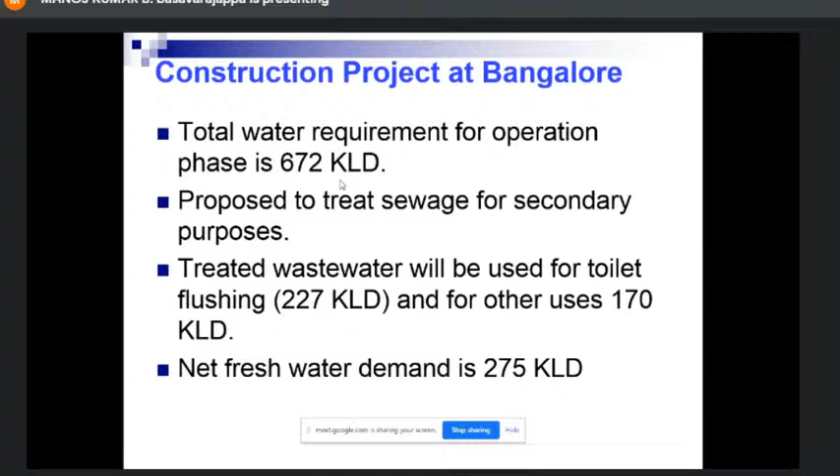In Bangalore, all apartments and commercial complexes are provided with a dual plumbing system - that is a two pipe system, one for drinking water, the other for treated wastewater. Treated wastewater will be carried in the other plumbing line for toilet flushing and other activities.

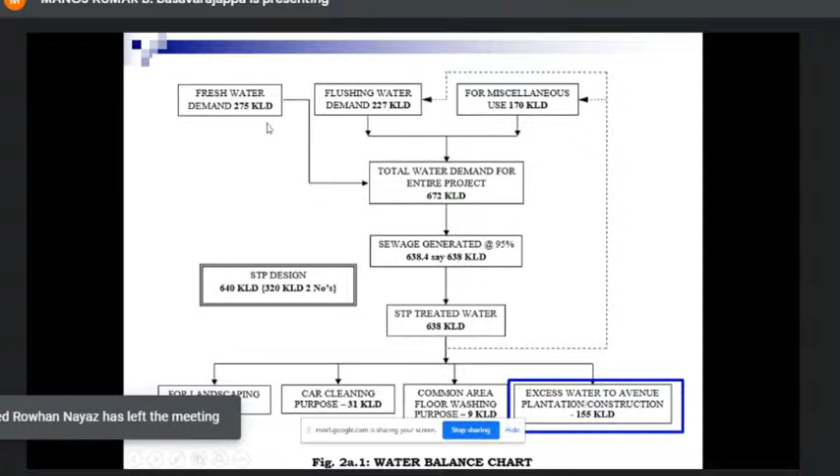So this is the water balance chart for that apartment: fresh water requirement is 275 kiloliters per day, flushing water is 227 KLD, and for other purposes like gardening or washing vehicles, it is 170 KLD. So total demand is 672 KLD.

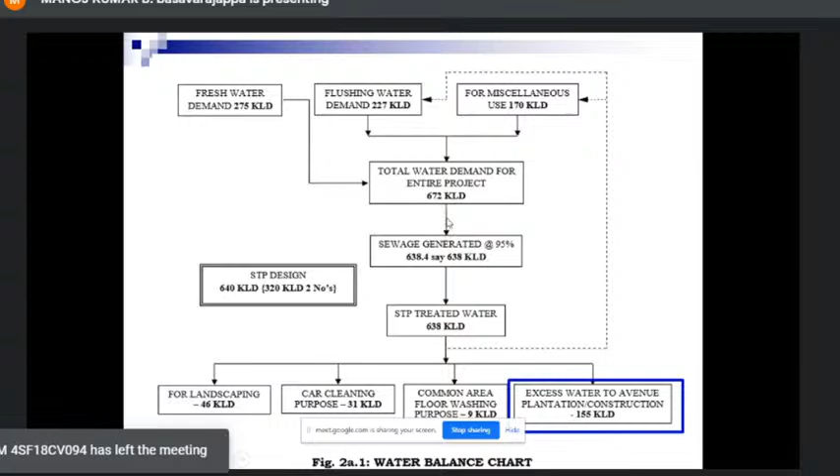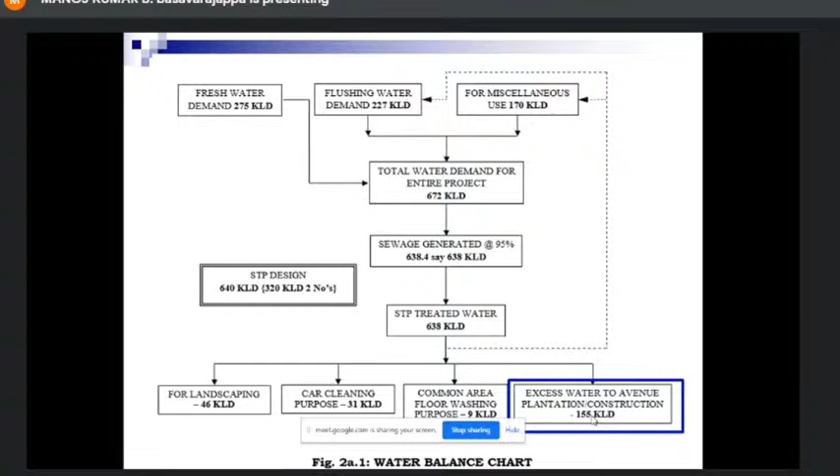Out of that, 95% will be converted to wastewater, around 638 KLD, and a 640 KLD STP will be provided. The treated wastewater will be used for landscaping inside their premises, 46 KLD, car and other vehicle cleaning purpose 31 KLD, common area and floor washing purpose 9 KLD, and excess water goes to avenue plantation and construction work. For construction, they will sell the treated wastewater to other builders for construction activity.

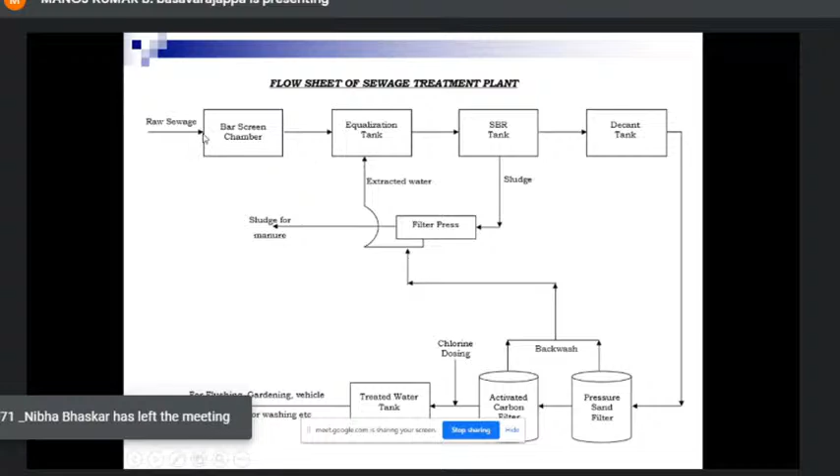This is the flow scheme, and SBR - I told you about the anaerobic aerobic phase. First is bar screen, equalization tank. Then the biological reactor, and decant tank. This is a batch reactor, and whatever sludge is produced, which is rich in phosphate, will be used as manure.

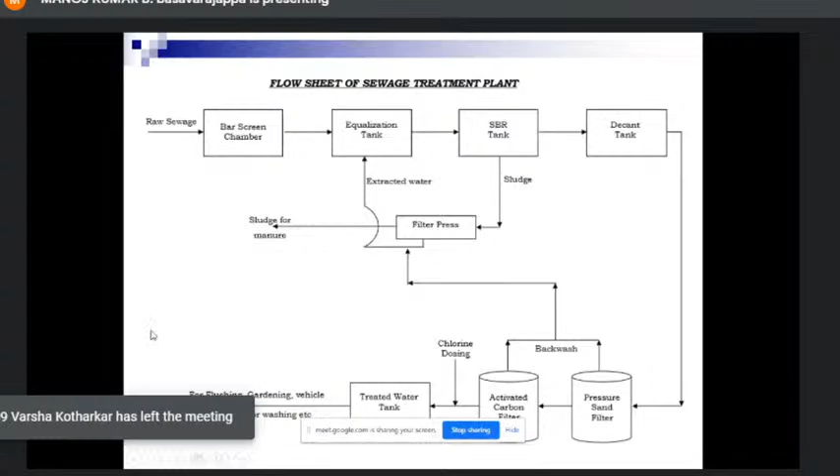The biologically treated water is taken to pressure sand filter and activated carbon filter, wherein solids, color, and odor will be removed, and chlorine is used for disinfection. Once disinfected, it is taken out and used for various secondary purposes. This is the sewage treatment plant that is provided.

Almost all apartments and buildings at Bangalore follow this, and this is the water breakup at 670 KLD. For residential units, I said 135 liters per capita per day. For clubhouse, it is 15 liters per capita per day. And the flushing water requirement is 45 liters per capita per day - it is like that.

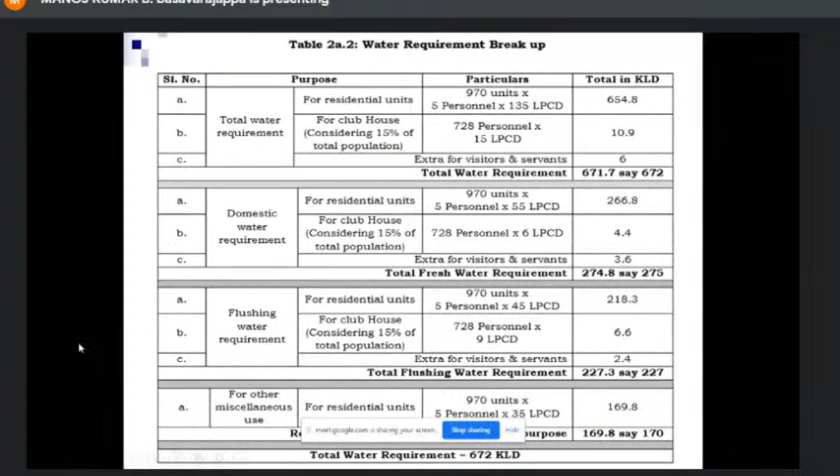So they will show the water breakup, and total water required is 672 KLD, and a 672 KLD STP will be used.

Okay, this is sustainable development. I will skip this. Final topic is NEWater, also called new water in Singapore. If you Google it, you will find this information.

In Singapore, the availability of space is very less, and water requirement is more. So what they are doing is reclaiming water from wastewater generated in Singapore. They are also buying raw water and wastewater from Malaysia, and have made an agreement till 2061 for supply. They buy the wastewater and raw water from Malaysia and treat it in Singapore, and the treated water is ultra clean and safe to drink.

Wastewater generated from Singapore and Malaysia, and raw water from Singapore and Malaysia, is taken and treated at one place with 4 treatment units, treated to such an extent that it is ultra clean and safe to drink.

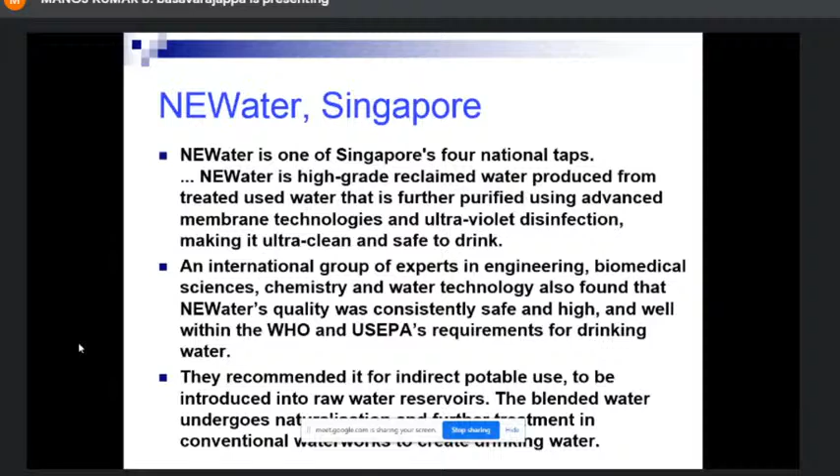An international group of experts in engineering, biomedical sciences, chemistry, and water technology conducted research on NEWater quality, and they confirmed it meets the requirements of drinking water.

With 5 million people living in Singapore in 2014, NEWater supplies are transforming wastewater to qualities better than what we get in our tap. What we get in our tap is treated water - from a river, water is taken and treated. But in Singapore, wastewater is treated, and they are maintaining the minerals in the water.

That is very important - in recycled water, they maintain the minerals, similar to what we call mineral water or bottled water in India. This is obtained from wastewater, and 4 purification plants produce 430 million liters per day of new water, given to industry, cooling facilities, as well as for drinking water requirements.

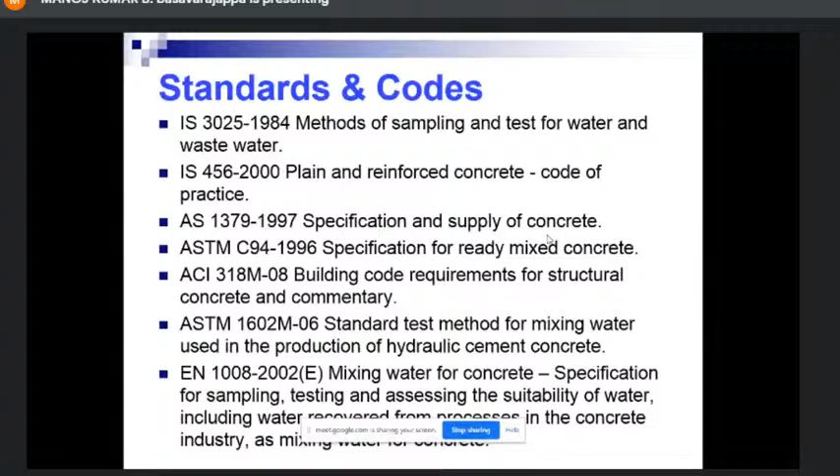So these are some of the standards and codes for testing of water for concrete or mixed concrete, structural concrete. You can look into these codes.

Finally, closing the loop, we have source to tap. In the beginning I showed river examples where we are polluting the rivers. From that source, we take it to tap as drinking water management. But in our houses, we convert that precious water to wastewater and send it back to the same source, the rivers. But that should not happen.

That should not happen, and we have to go for wastewater management. We should avoid discharging wastewater into our rivers. That is this year's theme for World Environmental Day - ecological restoration. We have to prevent such activities. How we can prevent it is by using such treated wastewater for other secondary purposes. We need to tackle pollutants at their source, not at the end of the municipal effluent pipe.

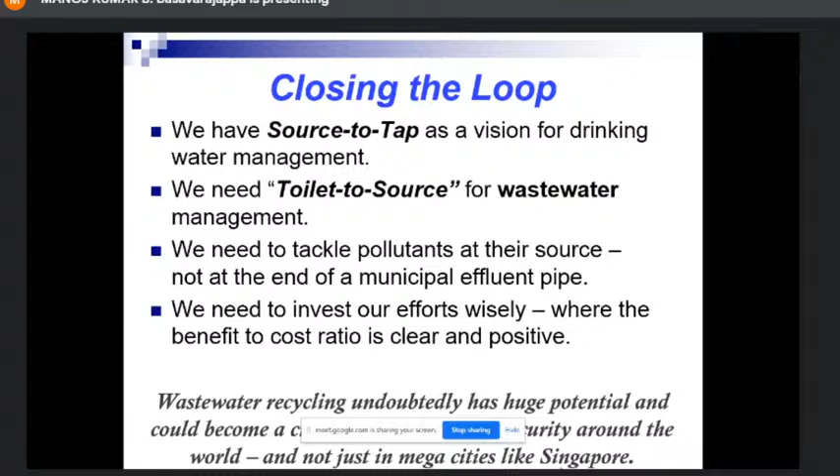And we need to invest our efforts wisely where the benefit-to-cost ratio is clear and positive. The best example is mega cities like Singapore, wherein the wastewater is converted to crystal clear water that we drink. While they are converting it, at least what we can do is treat the wastewater and use it for other secondary purposes - it might not be for drinking water, but we can use it for secondary purposes.

We can restore our rivers. We should allow the aquatic species, flora, and fauna to be there in that environment. How we can do this is by treating the wastewater, and we should not let the wastewater enter surface water bodies such as rivers.

So this is my presentation. If you need any clarification, we can get the clarification. Sunil, I'll stop at this stage.